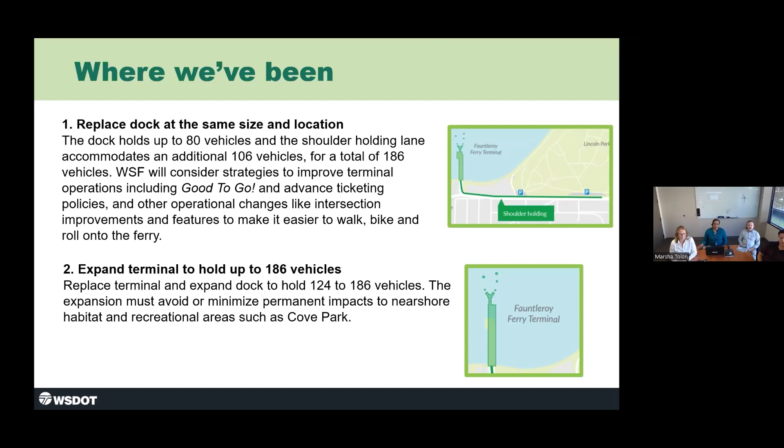When we met last time, we shared the level 2, really high level screening process that we'd done and got feedback on that. That process narrowed us down to 2 really general alternatives: replacing the dock at the same relative size in the same location as it is today, or expanding the terminal in the same location while minimizing permanent major impacts to the nearshore environment in Cove Park. So with those 2 very broad alternatives, where we left off about a year ago, the project team's been working really hard to refine those alternatives and develop more specific alternatives, which we're looking forward to sharing today.

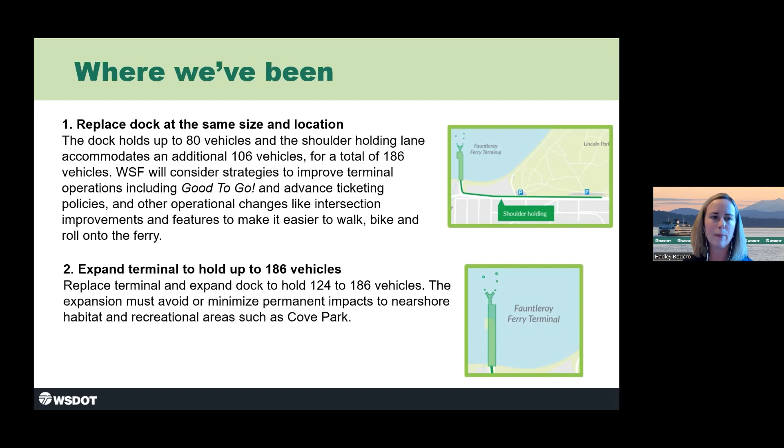Marsha's now going to talk through a little bit more about the project process and where we're going from here. Thanks, Hadley. We appreciate your patience with us over the past year as we've navigated the planning and environmental linkages process and worked to refine some alternatives. This planning process involves collaborating with the community and our partners early in the project. As you can see, we began in 2021, and our outlook takes us through 2029.

During this time, we've developed a purpose and need for the project, conducted levels 1 and 2 screening alternatives, and now we're starting the level 3 screening process. This is where we will consider criteria such as traffic conditions, cost estimates, permitting requirements, and ways to make the terminal work safer and more efficiently for everyone. We'll also study Good To Go and advanced ticketing. All of this work will help us identify a planning level preferred alternative for further NEPA environmental review.

That's the National Environmental Policy Act review, where we will use specific methodology to evaluate the potential impacts on the built and natural environment. We're working on an updated project schedule and plan to begin design and construction by 2027. Please note that there is some overlap between some of our tasks of these project phases, and that really indicates that there's some flexibility in the way the project would be delivered. We're working to refine the delivery approach, and we'll share updates at a later time. This multi-year process will continue to include multiple opportunities for input from our advisory groups and from the broader community.

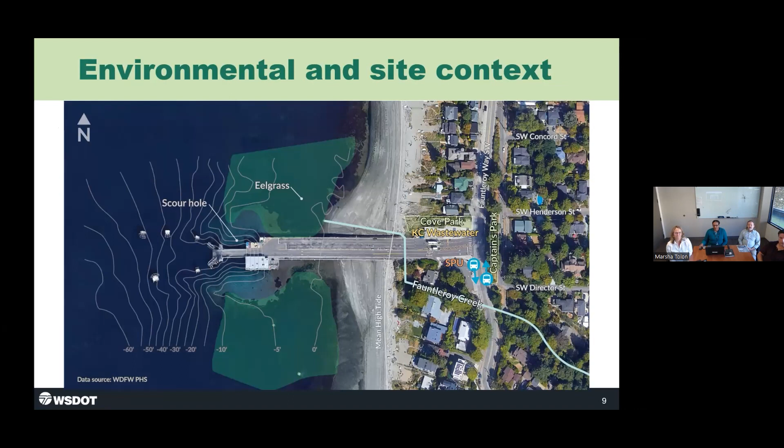So I want to hit on some of the common features of the alternatives you're going to see, and then we'll go through the individual alternatives. These are features shared by all the alternatives, so I want to make that distinction here. I'll let you read through these yourself. I do encourage you to follow along. We sent out a PDF of this report, and you can follow along. I think it starts on page 9, the various features that are common.

You've heard this in previous presentations about the seismic resiliency, or lack thereof, of the facility, the issues with climate change and the location of the dock in the water, and the challenges we have with operations and making sure we're providing access to all modes of travel to and from the terminal.

I'd like to add some other things we're doing, including some of your and your constituents' interests. We're studying Good To Go as an option to implement. We're looking at advanced ticketing. We're also going to examine overhead passenger loading. And one thing we've been working on recently with SDOT is improvements at the intersection, again to improve safety and access. So those are some other things we're going to be looking at along the way.

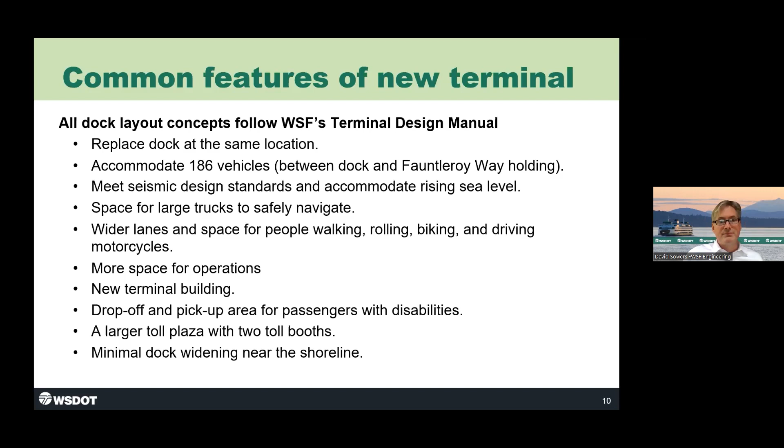Next, we're going to flip through the alternatives we have been looking at. There are slight variations to each of these. So I'm going to ask Hadley to flip through these in rapid order to give you a feel for the changes and differences between each alternative. And then we'll go back and talk about each alternative specifically. Just bear with us as we do a quick slideshow through the alternatives, and once we've looked at those, we'll come back.

From these pictures, you can see slight variations in the length, the width, and where the vessel is located. And you can see, I'll highlight what Marsha mentioned earlier, this dark blue area which is the eelgrass and macroalgae beds on either side of the dock.

So let's start with Alternative A. This is the first option we're looking at. It replaces the dock at the same size as the current dock, so it's the same length, same width. It maintains the existing berthing structures that guide the ferry into position. This alternative holds 76 vehicles, which is fewer than the current dock. The reason is this concept takes into account the access needed for large vehicles to turn into the dock, as well as added space for pedestrian walkways, bicyclist walkways, motorcycles, and vehicles in general. So we're compromising a little by providing those additional spaces, meaning the dock holds 76 cars instead of the current dock's 84 cars.

It's hard to see the difference when we toggle back and forth, but this option is the 84 car dock, the same size dock we have today. It is slightly longer in order to accommodate that and still maintain the design standards we have around widths and lengths for pedestrians and bikes. This option, being slightly longer, includes new dolphins and wing walls.

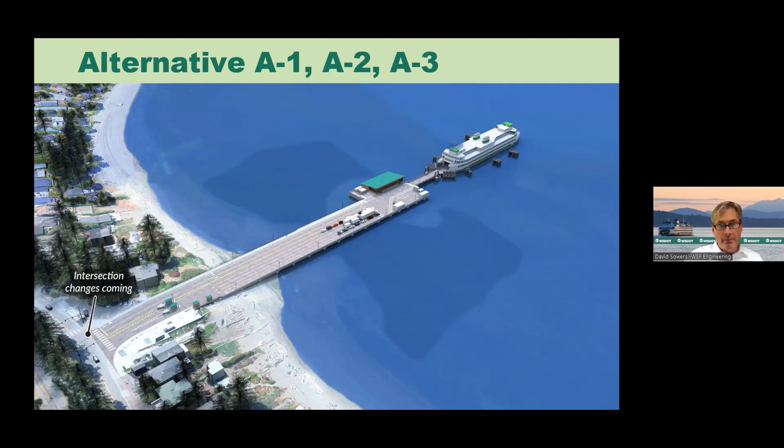This one reaches out a little further offshore but holds the same amount of vehicles as we have today, and that's the important feature here. When you tour the facility today, we'll show the differences in widths between these alternatives. A2 and A3 are variations on A1: A2 involves implementing Good to Go technology, and A3 involves advanced ticketing to help manage the operational side of the dock. These are variations on A1, but in geometry, the docks are all the same size.

The next alternative, B, builds a longer and slightly wider dock which has more space for large trucks to turn into the dock. Lengthening the dock also moves the ferry into slightly deeper water, which would allow the eelgrass and macroalgae to regrow in and around the scour hole. This option holds 124 vehicles over the water downstream from the ticket booths, equivalent to the capacity on the Issaquah class vessel that serves this route. Remember that number, 124. It's a bit longer than the previous version, but we push it offshore because we feel there's advantage to the eelgrass reestablishing itself around the dock.

Alternatives B1, B2, and B3 are variations on B, slightly longer with different lane configurations. B1 is the same length but includes an extra holding lane over the deeper water north of the dock. This gets a little wider, but minimizes impact on Cove Park and environmentally sensitive areas closer to shore, so it sort of hourglasses slightly. This alternative holds 154 vehicles on the dock, slightly larger than the 124 version.

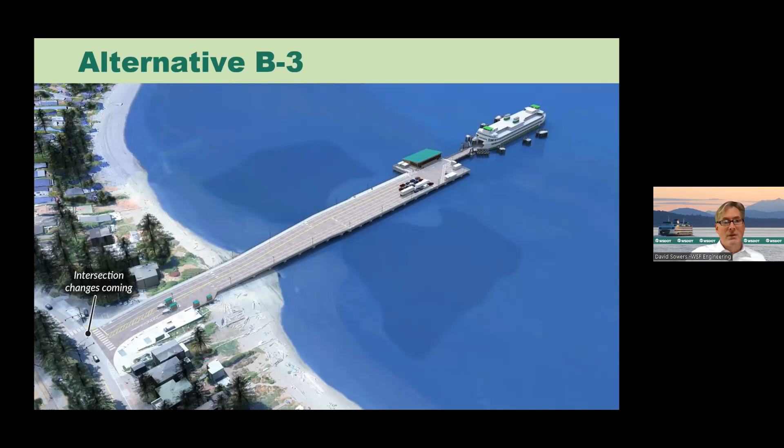Finally, the last alternative is alternative C, and this dock holds 186 cars. What 186 represents from our terminal design standards is 1.5 times the vessel class holding capacity: 124 car vessel times 1.5 equals 186. This dock is narrow near the shoreline, hearing the feedback from the community, but then widens as you get further offshore, and includes two shorter holding lanes for priority vehicles, motorcycles and bicycles.

The intent of this option is that the staging that is largely now the majority of staging on Fauntleroy Way would all move downstream of the toll booths, out over the water, with all 186 cars staged there. With the exception of some peak seasons and holiday travel, this should relieve a lot of the congestion of people staging on Fauntleroy Way and parked in front of Lincoln Park.

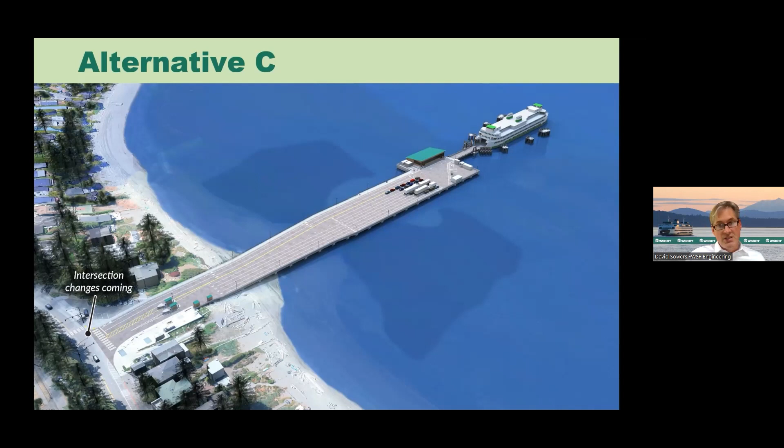So I know that was kind of quick. Hadley, I'd like to see if you could facilitate some Q&A now if people have questions about these alternatives, and I'm happy to go through the specifics again. Sure, thanks Dave. So any questions, discussion, or clarification? Why don't we start with clarification type questions, and we can cycle back through the slides if that would be helpful.

Anybody have any questions or want to see one of the alternatives again or learn more about it? Any comments about any of these alternatives or the range of alternatives? The idea here is we're looking at this range, and then we'll do further work to evaluate these alternatives and select one of them as the preferred alternative to carry into the NEPA process.

Okay, I do see a hand up, Councilmember Herbold. Thank you. So the process is when you choose a single preferred alternative to go into the NEPA process, do all of the other alternatives fall by the wayside because you're choosing one to do the analysis, or is there also NEPA related analysis on any of the non-preferred alternatives?

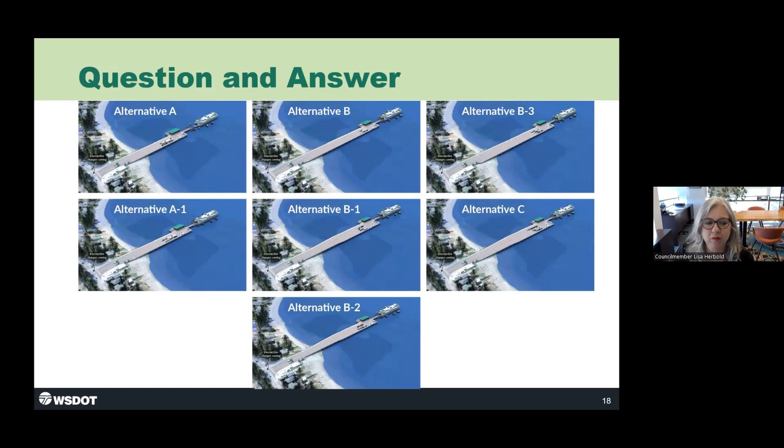Any other questions or comments or anything anyone wants to share at this point about this range of alternatives?

Okay, well, we will move along then to discuss, Marcia, you're just going to discuss the draft screening criteria that will be used to begin to evaluate these alternatives and do that selection process we were just talking about. Marcia. Sure.

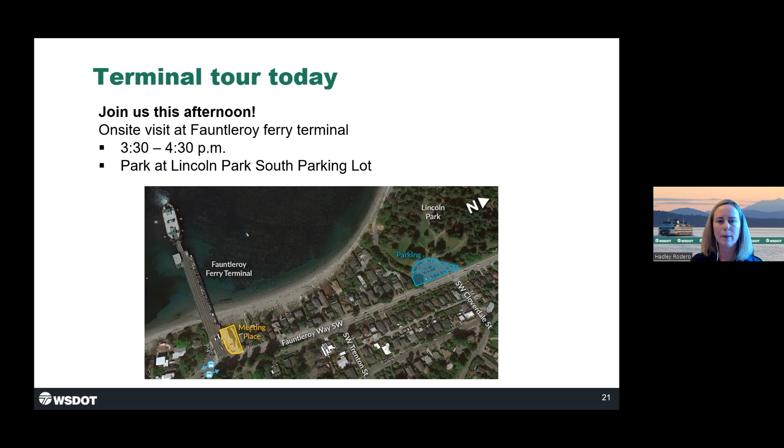Thanks, Hadley. Looking forward to showing you more this afternoon. We have meetings coming up next week—this was kind of a preview for that. You got a sneak look ahead of our community advisory group meeting on the 25th, and our technical advisory group meeting on the 26th. Those meetings are coming up, and we plan to have more after the first of the year. In the meantime, here are some things we'll be working on.

We're looking at further traffic analysis, particularly the intersection at Fauntleroy Way, and continuing environmental analysis. Again, this is all pre-NEPA, so it's part of the PEL study—I want to highlight that.

Ed's team is going to do construction phasing, looking at how in this constrained site we could build and replace the facility while it's operating. For those who watched Coleman Dock get reconstructed, you know that takes up a fair amount of space, and that's a very important part of how we continue this project, both in design and construction.

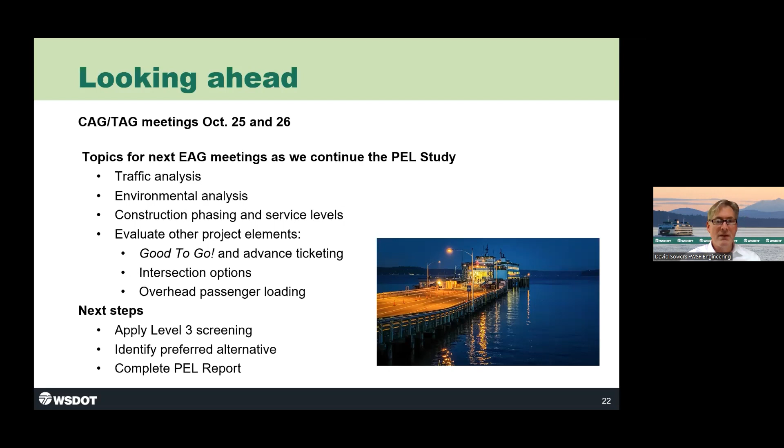We'll also take a more refined look at this level 3 screening, which you saw a preview of today, and eventually identify a preferred alternative and complete the PEL report. That's on track with our current schedule to be completed by spring of 2025—about a year from now. This will be a busy time as we narrow in on all this analysis and begin the level 3 screening. That's what's coming up. I think that's about it, unless there are any last questions on what you've seen today.

Any final questions for David or Marcia?